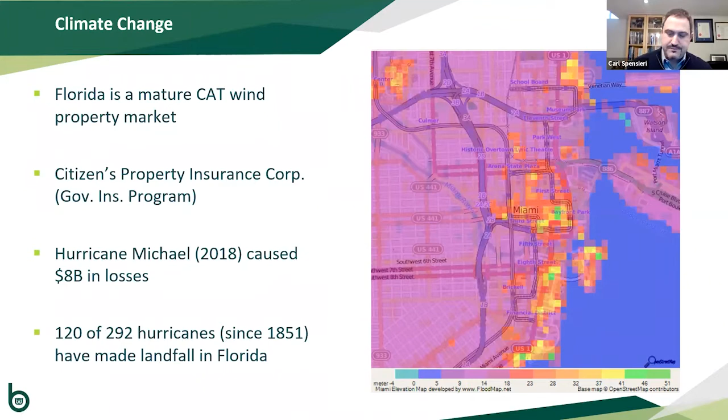From an insurer's perspective, we think pretty much anything south of Eastern Avenue in Toronto is ripe for some sort of flood event. These models aren't well defined, for various reasons, and that causes significant concern for us as an industry: how do I charge the appropriate insurance and create the appropriate policy language?

Policyholders are seeing that today. If you have homeowners insurance in this part of the world, it's basically a patchwork: I'll cover you for overland flood but not sewer backup, or I'll give you sewer backup but not infiltration. There's a variety of sublimits applied to people's policies. So the industry is uncertain how to tackle the problem and how to price it.

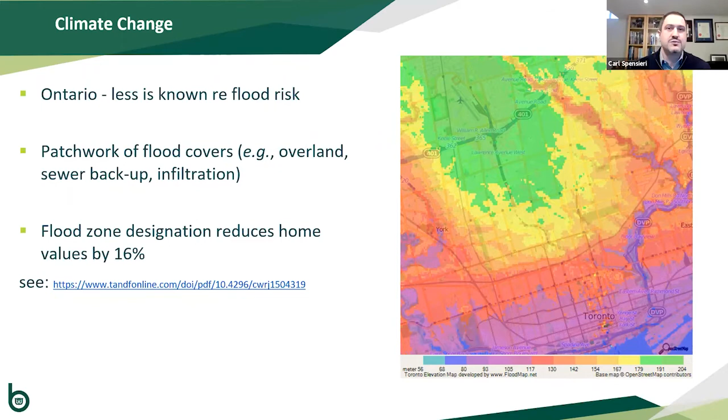One last thing before we move on: imagine a major storm event triggering mass flooding in the Toronto area. Homeowners may or may not be adequately insured. For those who aren't, they face a difficult decision: incur $50,000 to $100,000 of their own money to fix up and respond, or weigh that against other financial realities like mortgage payments. These are the types of things we grapple with as an industry—traditional insurance and the broader implications for the greater community.

Here too we have the same problem: the risk management frameworks and models we used to rely on as insurance companies are no longer holding up. For example, it was very common to see pipelines built right on top of what we thought was secure permafrost, which is now subject to freeze and thaw cycles, creating settling and landslide type events. So the frameworks we thought made sense are starting to show themselves to be incorrect.

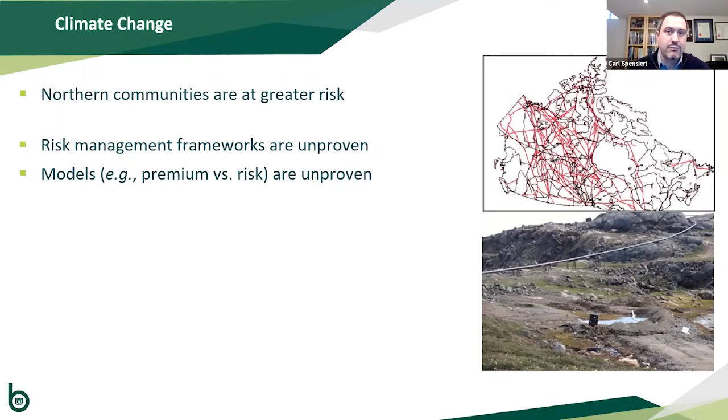And then there's the difficulty of pricing for this. If your models aren't correct, then the premiums you're looking to charge and the coverage you're looking to provide are probably incorrect as well.

Now here's where we get some real concrete examples—back to the Toronto area, my apologies. How do you manage flood? The old way for insurance companies was to look at flood maps and floodplains, using that historical data to inform future risk.

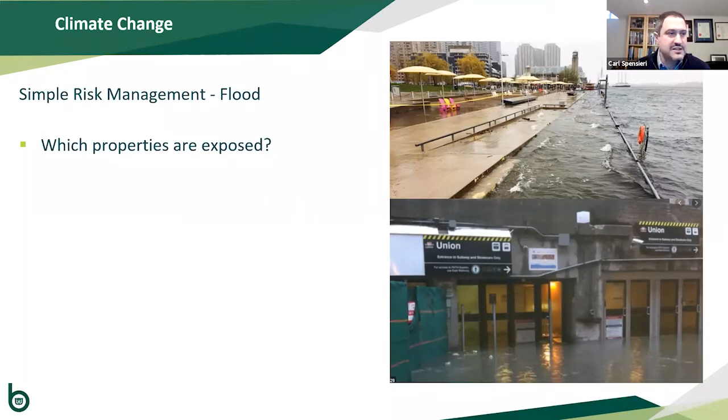That's 4 times in a decade for one of our most significant pieces of transportation infrastructure in the country. So I'll leave that here, and this is where Gord will pick up. He'll start talking about how we can evaluate and identify these risks and what we can do about that with regards to existing buildings.

I'll now switch and try to be a little more optimistic and speak to what it is we can do going forward to help us overcome this. One reason I'm often criticized for being too optimistic about climate change is that I realize today at least we understand what the solution is. Regardless of your views on climate change, whether you selfishly want the environment to improve, whether you have an economic incentive, or you just believe in environmental issues, one of those three threads is pulling you into the debate and asking you to take action to solve the problem. We have a concrete understanding of what the problem is and the steps needed to address it.

Here are some solutions that the insurance industry, in collaboration with others, has put together. The first one, relative to flood, what you're seeing at the top right-hand corner are homes in California, designed to help communities deal with New Orleans, Katrina-type events in the future. These homes are anchored into a foundation, but designed so they can float and move up and down as needed in the event of a flood.

Not only do they rise and fall with water levels, they're also equipped with solar panels and water filtration systems, so these homes can basically act as their own self-contained pods, not needing power from the grid or water from a municipal drinking source. In a major flood event like we had, families in these homes are able to be self-sufficient for up to 30 days. So that's quite an interesting and rather novel design.

These elements add about almost $100,000 to the cost of a home. But as you scale this across broader communities, these costs don't become too much of a disincentive, especially compared to the benefits of a community that can withstand a flood event. It starts to become pretty easy math to make these sorts of improvements work.

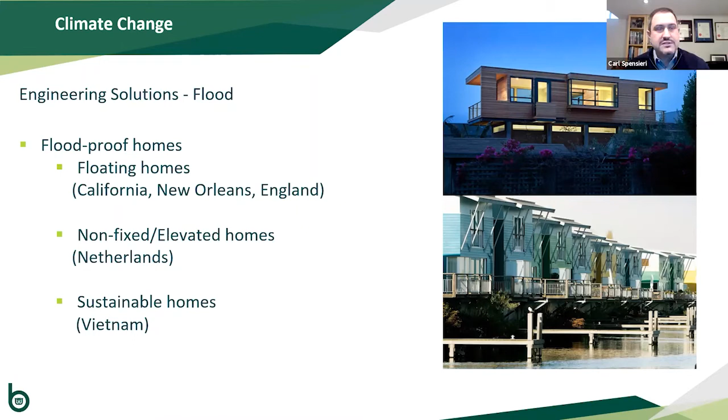So again, just a variety of different ways to tackle and adapt to the problem. We've been talking a lot about wind and water. Fire, interestingly enough, is what created the property insurance industry. We've done such a great job controlling and minimizing that risk that it's no longer one of the main drivers of property losses. But we're starting to see it come back, a function of our climate warming and unfortunately drying out.

Let's go south of the border to the other coast this time. If you live in California, there are roughly 4.4 million homes representing around 11 million people who are at risk each year due to wildfire. And if you live on the west coast of Canada, some of you experienced the smog and smoke associated with this year's fires in California, all the way up in Vancouver.

So again, here we have tools available to us. There are certain design elements we can incorporate into communities. We can even do things as extreme as creating communities with built-in fire corridors so that when these wildfires happen, they go through the community through a predetermined path, sparing critical infrastructure and residential areas and directing the fire elsewhere.

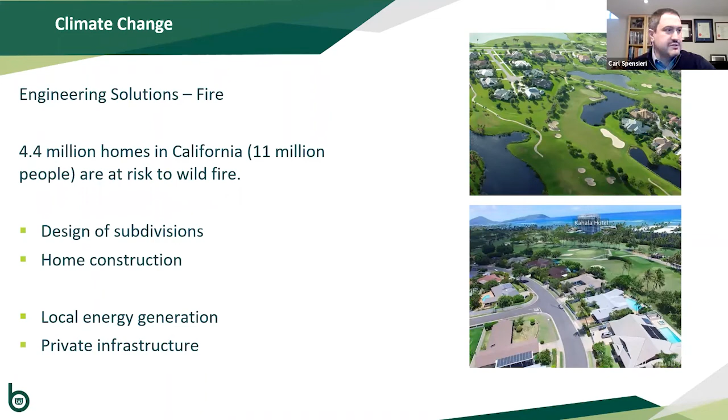So those are some simple examples. And now at this point I just want to hit on the third topic. The first piece, obviously I am part of the insurance industry, and as such they don't necessarily let me out very much. So when I get an opportunity like this, I certainly want to raise a couple of things that I see impacting our industry and our insureds. And I think that these are just items that maybe need additional conversation.

So the first one: during COVID-19, the Government of Canada made some grants available to businesses. And the one requirement for businesses to access those grants was that they agree to make certain climate change and ESG reporting part of their regular disclosure. And ultimately, especially someone like me in the environmental industry, you sit there and go, this is a great idea. And I think shareholders and investors need this information. And I think this is the direction we want to go.

But what concerns me is using an event like the one we've just come through to try to make some companies take this step perhaps a little sooner than they were ready to. And the reason I say that is, if you've ever been part of preparing any financial documents that these companies have to disclose, it's quite the process. And there's a lot of controls that need to be in place, and a lot of research that needs to be done for those disclosures to be accurate and not to cause additional problems.

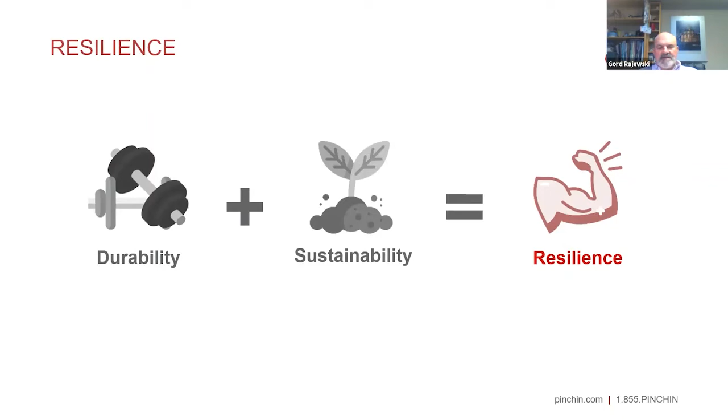What is resilience? Resilience is, by our definition, durability plus sustainability together equals resilience. We think resilience is the future of sustainability at Pinchin. There's a lot of interconnected aspects.

Multiple energy sources are considered, recycled, reclaimed water, disaster fortitude design, emphasis on passive systems, reduced environmental effects, floodplain evaluation, locally sourced materials, access to transportation, and indoor environmental quality. These concepts all intermesh between sustainability and resilience.

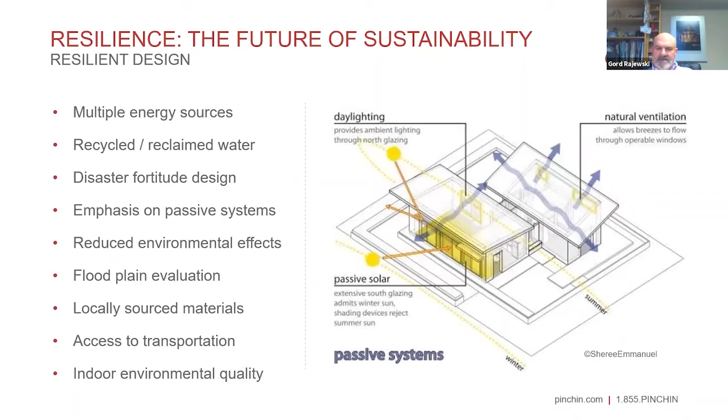Now let's talk a little bit about the work that can be done to anticipate extreme weather events. We call these climate risk vulnerability assessments. These vulnerability assessments are steeped in

codes, if you will, protocols that have been established and are in place and have been working in Canada for many years now. Going back to 2008, the PIEVC engineering protocol was first used to evaluate Canadian infrastructure against climate risk. In addition, there's the ASTM guide for climate resiliency, planning and strategy, the CSA guide for durability, ISO 31000, and all of these protocols are taken into context with BOMA BEST, GRESB, Fitwel, IRM, LEED.

So what does a climate change vulnerability assessment look at? It looks at your site. It looks at your structures. It looks at your base building systems, communications and security, interiors, equipment and furnishings, and it proposes risk mitigation and adaptation measures. It does this in concert with climate modeling.

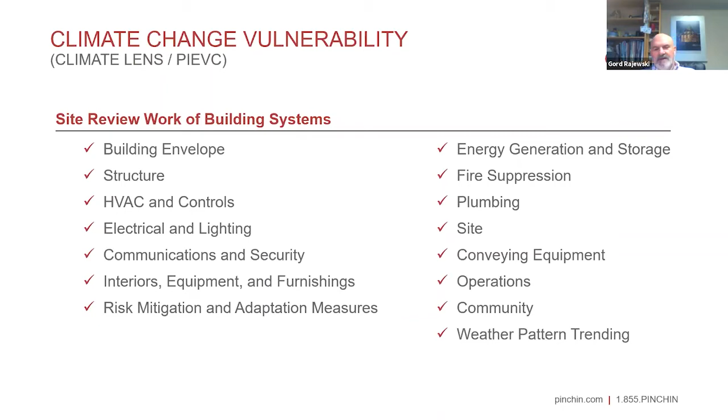So essentially what we do first is we look at where your infrastructure is located, and then we use a model that has been designed by Environment Canada to try to evaluate what the weather might be like in 5, 10, 20, 30 years from now. Knowing a little bit of that climate model data, we can then apply that to what we'll call our climate lens, so that we can then better evaluate your infrastructure against risk.

The outcome or the output of that assessment is a report. So this is a snapshot of a report that was prepared for 6 GO stations in Metro Toronto, where the evaluation included an assessment of the building structures and the systems in those building structures. Out from that, a table is prepared, which is basically the climate lens output.

This particular study concluded that the 2 greatest risks to these GO stations in Toronto were flooding, overland flooding, and loss of electrical transmission or electrical power. So once that was understood better, adaptation measures could be then proposed and recommended and eventually designed.

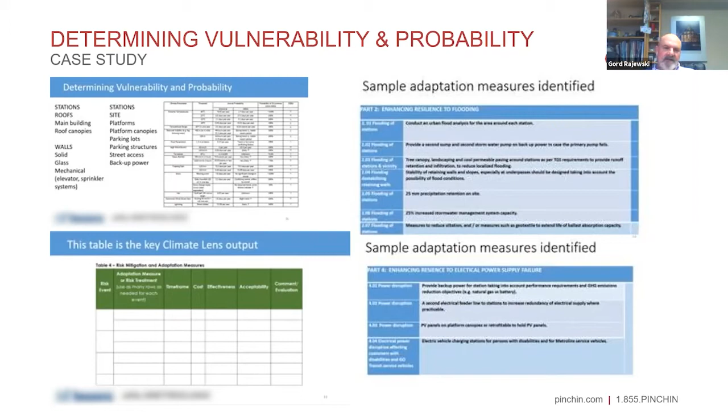So let's talk a little bit about strategic asset management and the economics of adaptation. Who's going to pay and how's that going to work? First, we have to consider, as Carl pointed out, the ESG aspects. For those who might not be familiar with what ESG refers to, it's environmental, social, and corporate governance.

These are the 3 central factors in measuring the sustainability and societal impact of an investment. This is really key because ESG is becoming a leading factor in how developers are going to be funded going forward for their new designs, and may also be funded for retrofit measures, adaptation measures that could be required.

To make their buildings more resilient in the face of extreme weather, one of the benchmarks used by investors globally is called GRESB. This is a global benchmark for the infrastructure sector that assesses ESG performance at the asset level for infrastructure asset operators, fund managers, and investors that invest directly in infrastructure. The tool offers high quality data and advanced analytical tools to benchmark ESG performance, identify areas for improvement, and engage with investors.

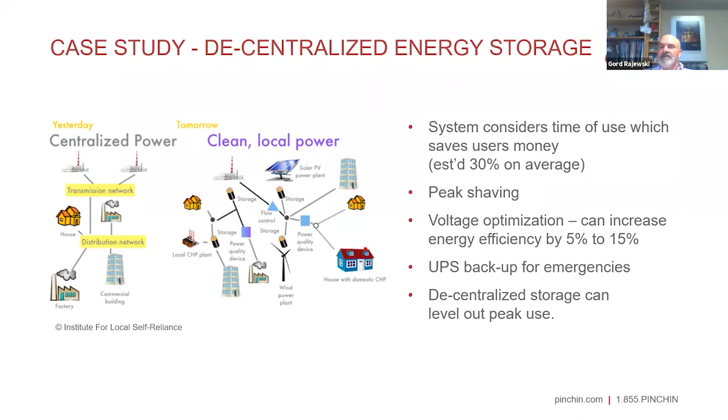A simple snapshot is an RBC branch in Ontario. The upfront investment for system equipment to introduce smart battery technology and photovoltaics was $65,000 for that particular branch. It was estimated that greenhouse gas emissions could be reduced by 2,800 kilograms, involving 47 tons of total GHG by 2035, which is a central goal of RBC. This also results in 54% annual cost savings, and it presents a 5-year ROI.

Now, why wouldn't an owner consider something like this for their building? You've got a short ROI, a relatively small upfront capital investment. You're doing good things for the earth, and you're paying yourself back in real time.

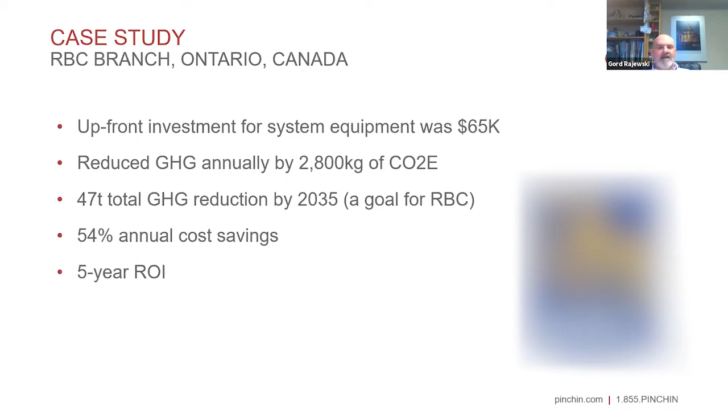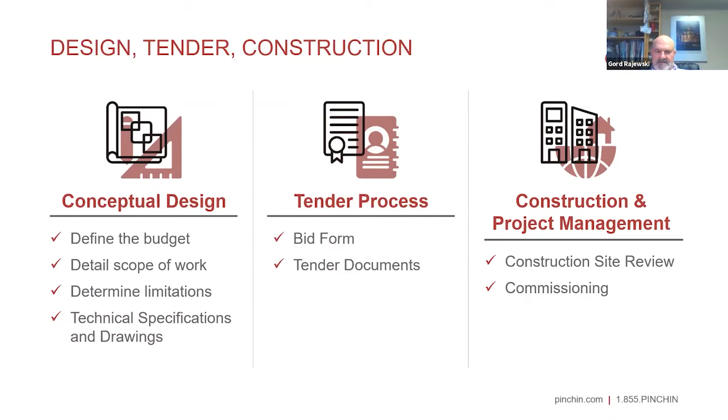Implementing adaptive measures, once it's understood what those measures are and what their cost might be, it essentially becomes a construction project at that point. There has to be a good design, a good plan. There needs to be tendering, construction and project management. Plus, there needs to be good commissioning and follow-up.

Now let's shift gears and talk a little bit about some of the things that my friend Carl has introduced to us today.

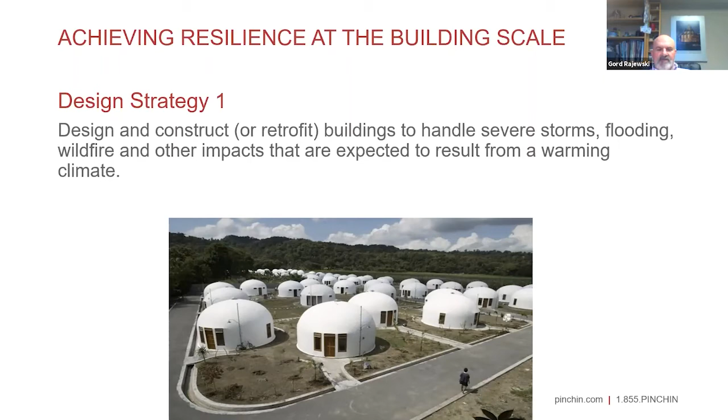The Resilient Design Institute talks about different design strategies. The first is to design and construct or retrofit buildings to handle severe storms, flooding, wildfire, and other impacts. The image on your screen is of a village in the Philippines highly prone to hurricane conditions. You can see by the shape of the buildings and the way they are spaced that this community has been designed to anticipate the high winds associated with hurricanes and other effects.

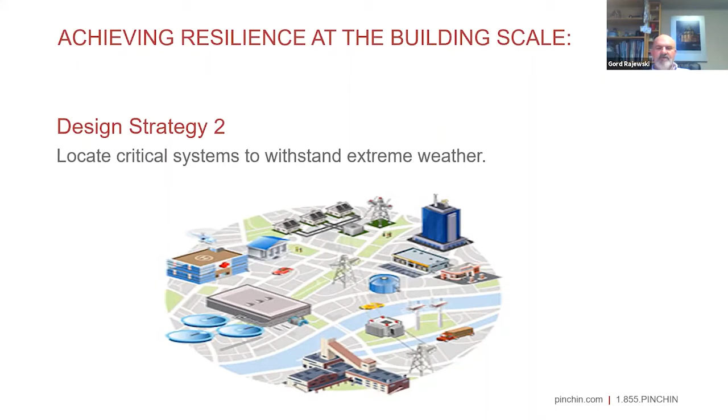Second strategy is to locate critical systems to withstand extreme weather. If it's identified that the key systems we need to survive are vulnerable, we must now plan how to move them or protect them.

Third strategy, model design solutions based on future climatic conditions as much as possible. This is an excerpt from a request for proposal from the Vancouver Coastal Health Region, where they're asking consultants to include in their design process what the weather might be like 30 years from now, so that the design accounts for the fact that current weather will not likely be the same in the future.

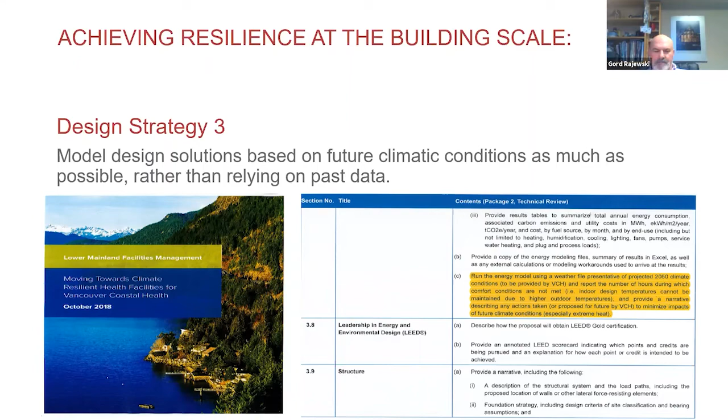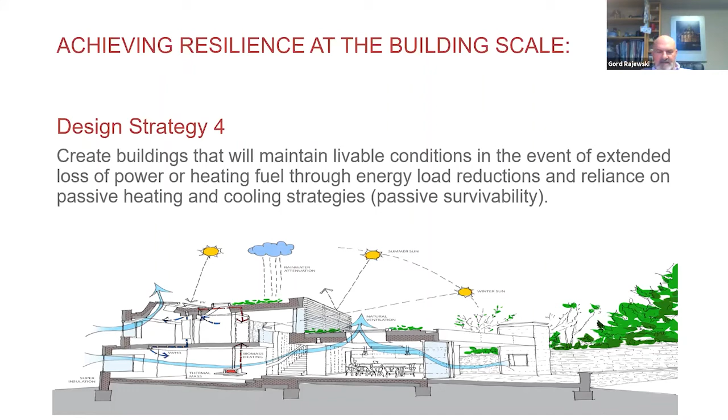Fourth design strategy, create buildings that will maintain livable conditions in the event of extended loss of power or heating fuel, through energy load reductions and reliance on passive heating and cooling. So if the power goes out for an extended period in Winnipeg, Manitoba, or anywhere on the prairies when it's cold in January, how can we create livable conditions that will allow people to survive and be sustained? That's the principle of this design strategy.

Fifth strategy, create durable buildings using features like rain screen details, windows resistant to hurricanes, interior finishes that can dry without needing replacement. Why are we still using gypsum wallboard in 2021? This is a material that when it gets wet, deteriorates and promotes the growth of mold. By now, we should be looking at something better, shouldn't we? Because this is one of the first products that is often removed after a flood condition. So I'll leave that with you now.

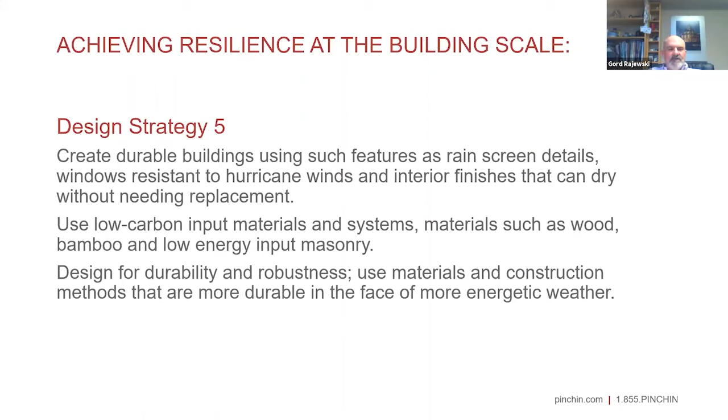We also want to use low carbon input materials and systems, materials such as wood, bamboo, and low energy input masonry. We want to design for durability and robustness.

Sixth strategy, create beautiful buildings that will be loved and maintained. We are not advocating building concrete pillboxes and bunkers that no one will be happy living in. We're not advocating buildings that have no windows, that don't have natural light. We're actually advocates of the opposite, that if we can create designs that people will enjoy being part of, but these designs are also created with resiliency in mind, likely these buildings will be preserved, maintained, and people will enjoy being in them.

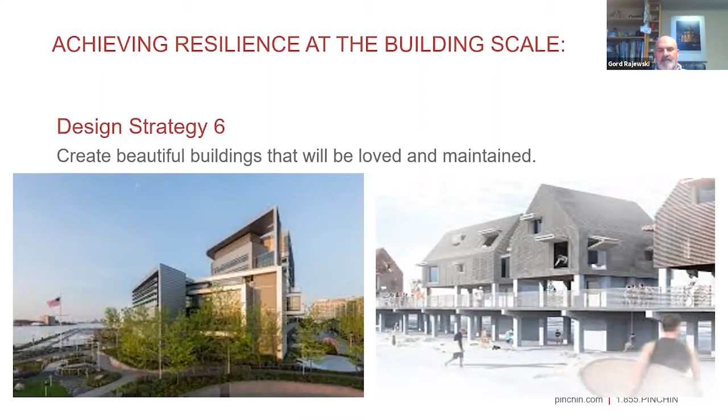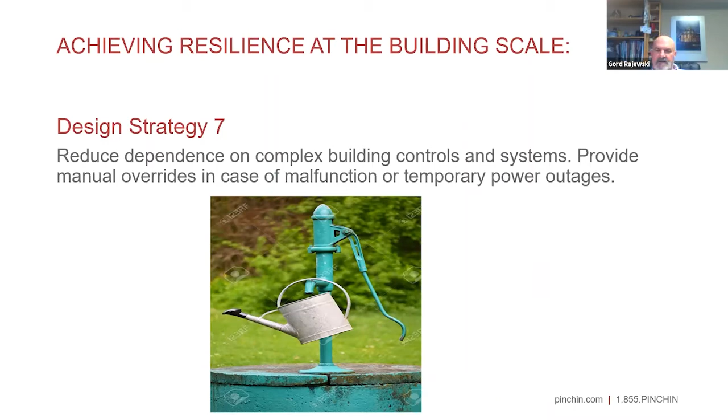Seventh strategy, reduce dependence on complex building controls and systems, provide manual overrides in case of malfunction or temporary power outages. A simple analogy or example is the water pump. Perhaps we'll have wells or other means to draw water from should the electrical power be down for a while.

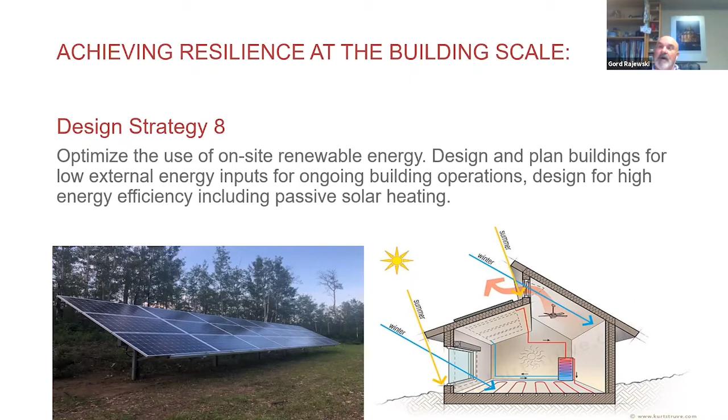Eighth strategy, optimize the use of on-site renewable energy. Design and plan buildings for low external energy inputs for ongoing building operations. Design for high energy efficiency, including passive solar heating. The image to the right shows a home that incorporates passive solar heating, allowing the sun in, allowing the walls and floors to be heated using the sun's power. The image to the left is a solar panel grid that one can purchase and have available on their property to collect power and to pay back to the grid.

Ninth strategy, design buildings for maximum daylighting. Daylight will be the primary source of lighting for buildings in the post-carbon city. So the shape of your building, the way the windows are positioned to allow light in, reduces the need for electric lighting.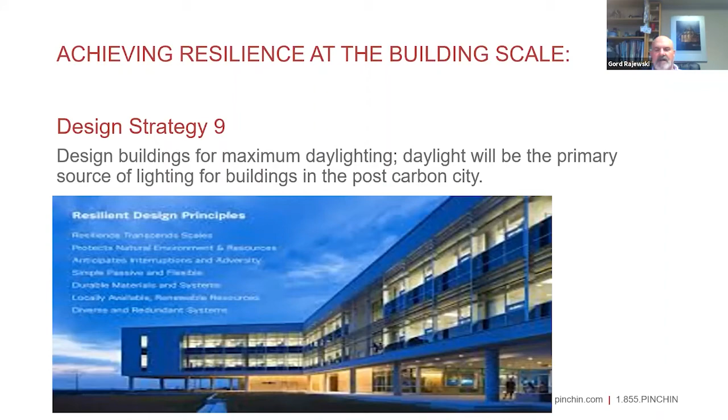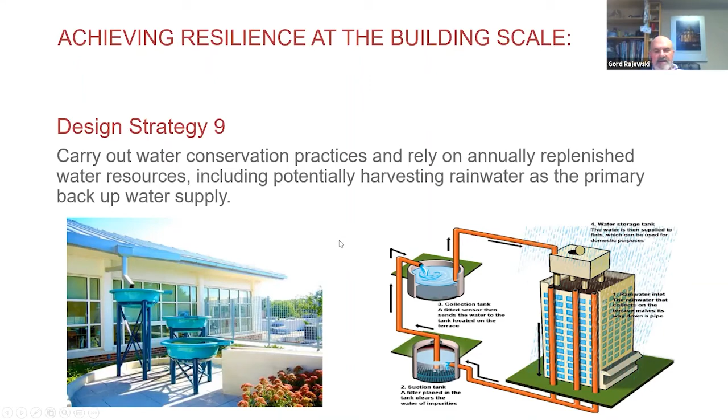Carry out water conservation practices and rely on annually replenished water resources, including potentially harvesting rainwater as the primary backup water supply. This is not a new idea. We've been doing this for some time. Some communities are doing this already, and doing it better.

Here's an idea I'm quite fond of: recognizing that extreme weather, annual rainfall, and extreme rainfall will be increasing in certain locations in North America, what if we were to re-examine the ability of a building to store and capture that rainwater for a period of time while we allow the municipal system to catch up? If we could store more water on top of the building safely without causing damage to the interior, we could use that water as needed elsewhere in our daily living, or release it back slowly into the municipal infrastructure system. This would involve significant redesign of structure and waterproofing, but this is called a blue roof, as opposed to a green roof.

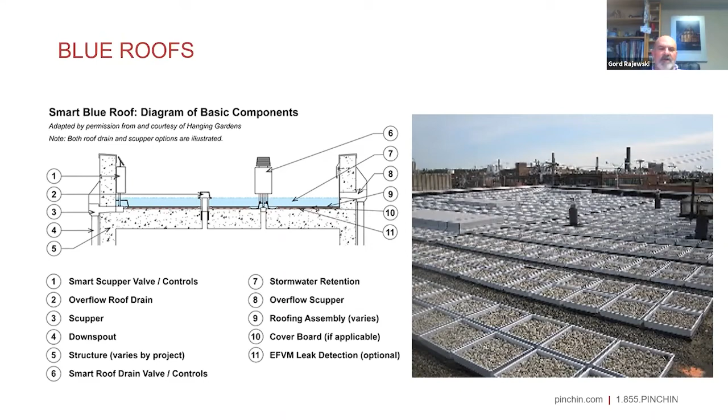Another way to provide redundant water supply is the concept of using gravity-fed systems, which have been around for hundreds of years. In small communities throughout North America, and Canada in particular, the image of the water tower is still with many people, as some of these towers remain in use. On Manhattan, you'll see lots of these wooden structures on top of buildings. These are in effect gravity-fed water reservoirs that supply water whether or not there's power available to drive the system.

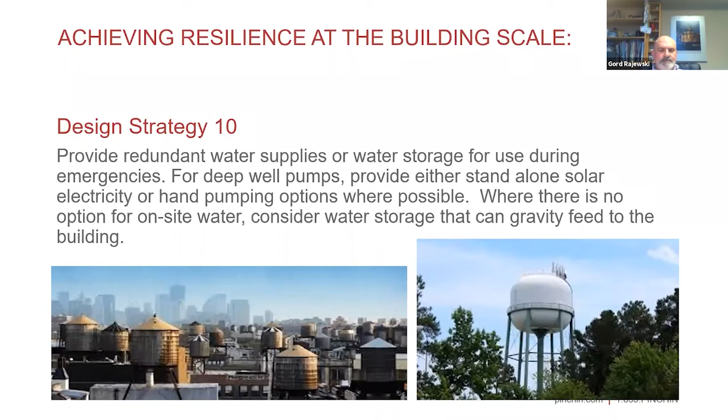Considering options for human waste disposal in the event of non-operating municipal wastewater, using composting toilets and waterless urinals.

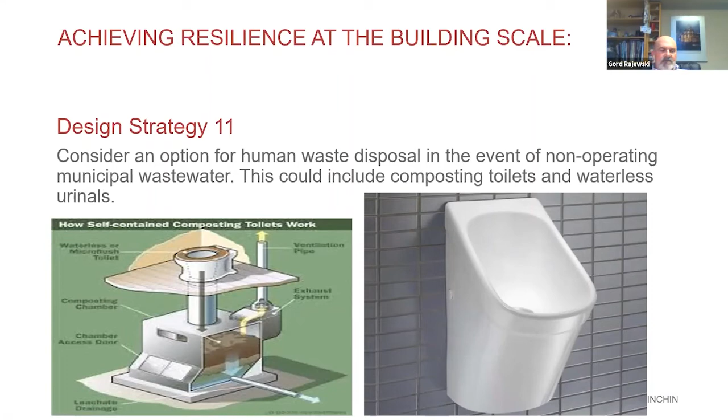The 12th strategy: design for use of local materials, available products, and skill sets. Resilient cities will need to be much more localized in their use of materials and products. We use the example of the Richmond Olympic Oval, a beautiful timber-framed structure with laminated beams that arch through the interior. All of these products are locally available in British Columbia.

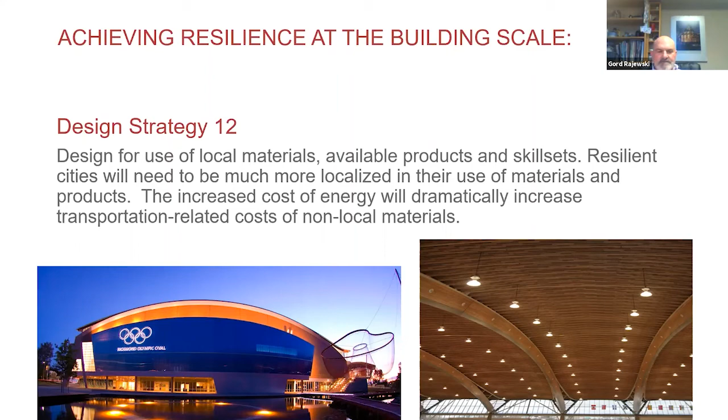13th strategy: we must specify products and materials that will not off-gas or leach hazardous substances in the event of flooding or fire. I already spoke about why we're using gypsum board, drywall, to this day. We use it because it's cheap and readily available, but it's one of the worst materials to have inside our home if there's a flood. If we were to look at alternate products that will not mold, or cause people to become ill post-flood, that's what we should be doing. We should be considering opportunities in building code and looking at materials that will be healthier for us in the event of extreme weather loss.

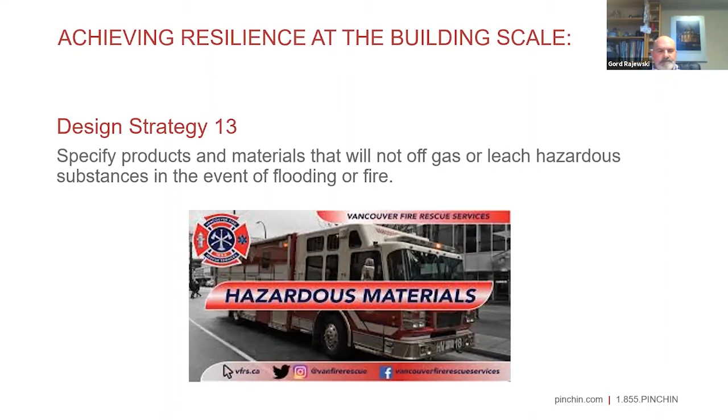We should be relying on vernacular design practices. Basically what we're saying here is we want to go back to the future, if that makes sense. There are many lessons that can be learned from the past that we should be bringing forward as we contemplate extreme weather and its effects as climate changes.

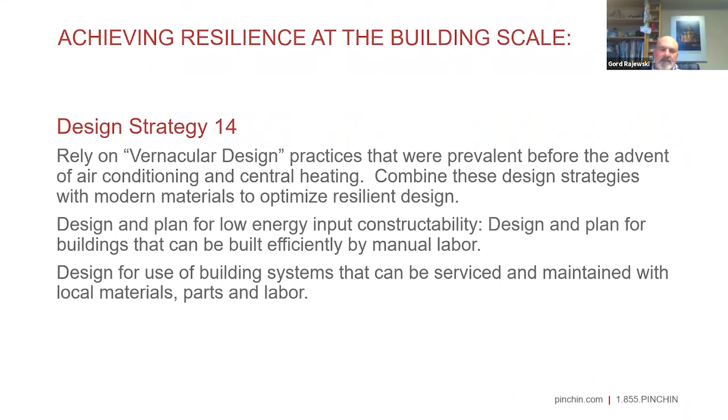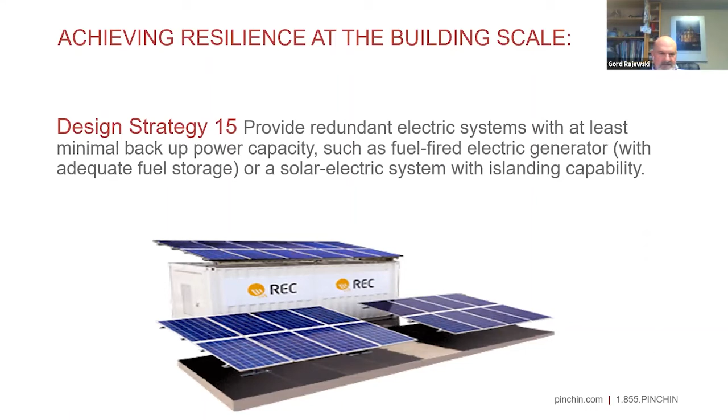15th strategy: provide redundant electric systems with at least minimal backup power, such as fuel-fired electric generators with adequate fuel storage, or a solar electric system with islanding capability.

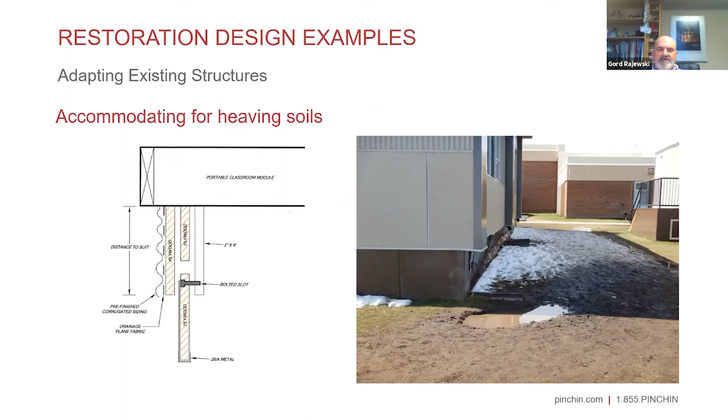The image shows a simple sketch of how you can introduce an adaptive measure that recognizes the annual heaving is likely to continue. If we know this is happening, we can adapt and create simple designs that allow the soil to move up and down in the spring without causing damage that has to be repaired and replaced annually.

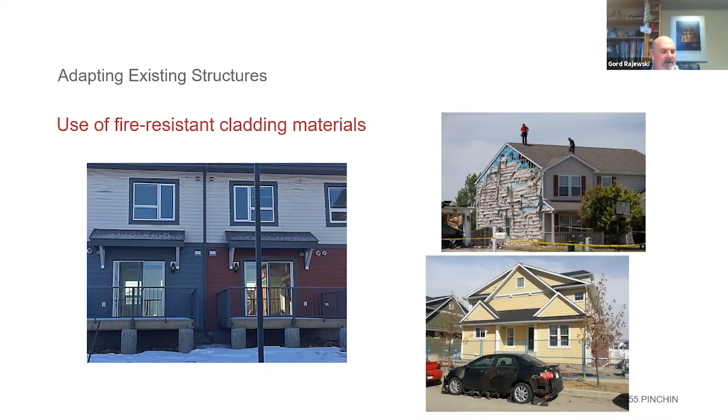Use of fire-resistant cladding materials. Here are various images showing the effects of heat and fire on residential buildings. The image at bottom right shows a car parked in front of a house in a neighborhood subject to wildfire. The car suffered melting and other damage, whereas the house's cladding did not, because it was of a kind resistant to fire.

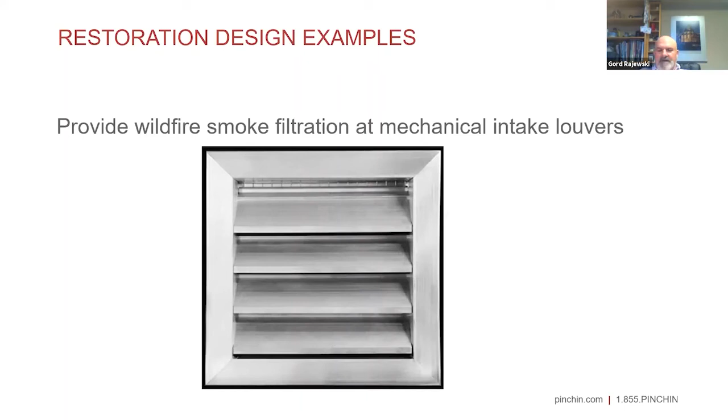In Fort McMurray, during the wildfire, more than 25% of the building infrastructure burned. But what we also don't always hear is that 80% of the building infrastructure suffered damage from smoke infiltration, soot, and other particulate damage. If we understand that wildfire is a threat and a risk, why aren't we putting more thought into creating filtration systems at the outside of the building envelope, in recognition that if the building doesn't burn, it's probably still going to be subject to harmful smoke infiltration?

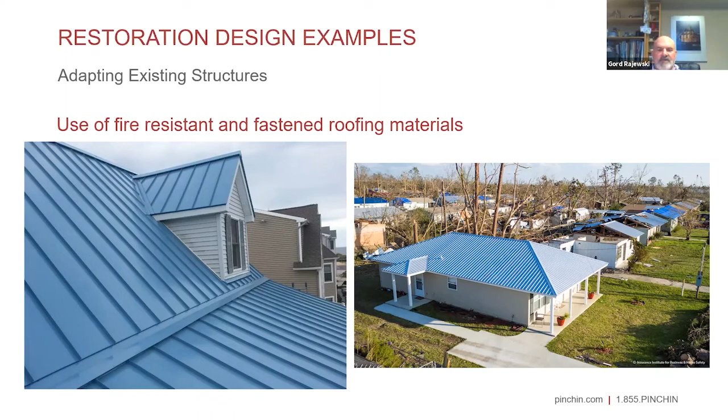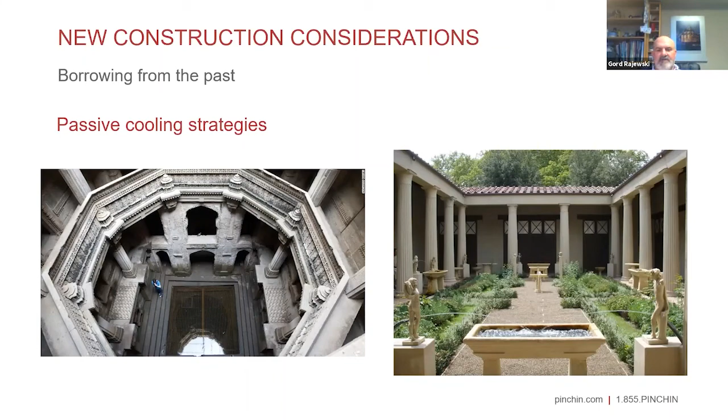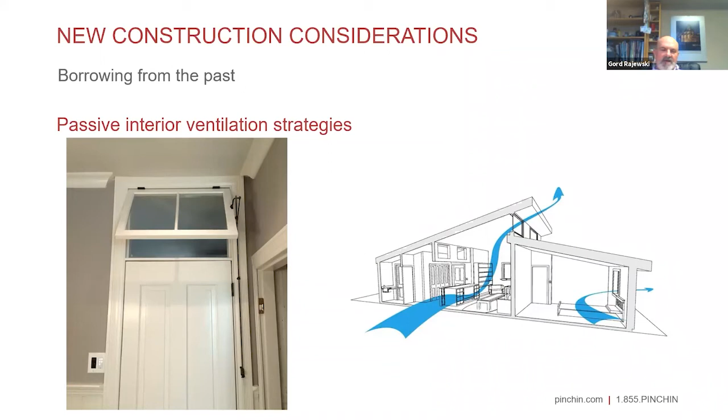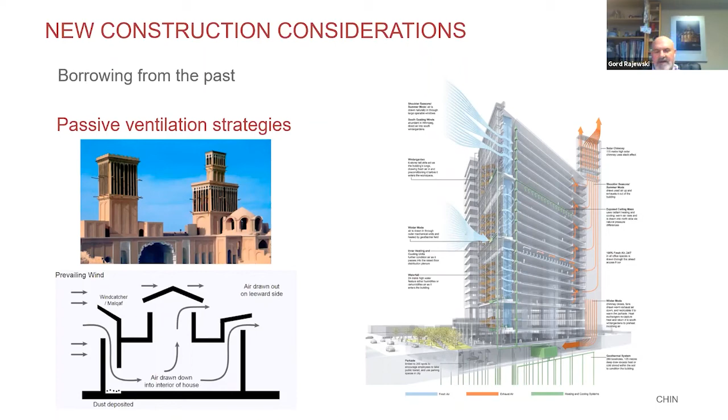Modern examples of passive interior ventilation strategies include transom windows and the basic design and shape of buildings to allow air to flow through during those times when you can't have your windows open in Canada. Modern buildings like the Manitoba Hydro building on Portage Avenue in Winnipeg incorporate many of these principles. You can apply the same kinds of thinking to high-rise design as you can to residential design. Basically, we're trying to use passive techniques to reduce our reliance on mechanical fed ventilation.

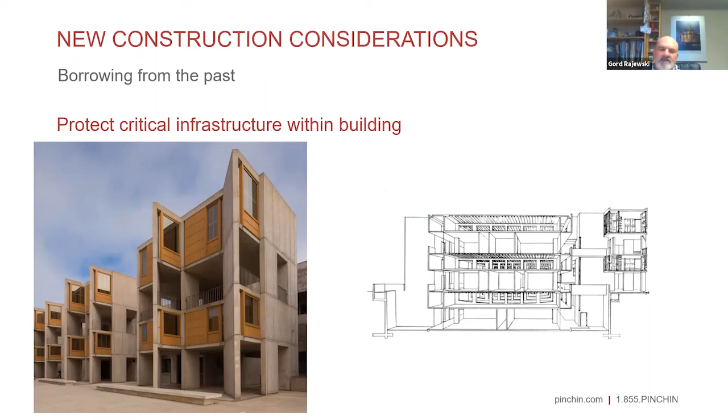Protect critical infrastructure within the building. This is an institute in California where you can see by the shape of the building that it's been designed to let water flow through it. All of the critical systems are inboard of the outside, protected inside concrete ductworks. So this building is quite protected against flooding, wind, fire, and other such weather.

Maximizing daylight through floor plan shape, let the light in. This is an old example, an old building in Edmonton, Alberta, a federal government building that incorporated many of these philosophies in its design.

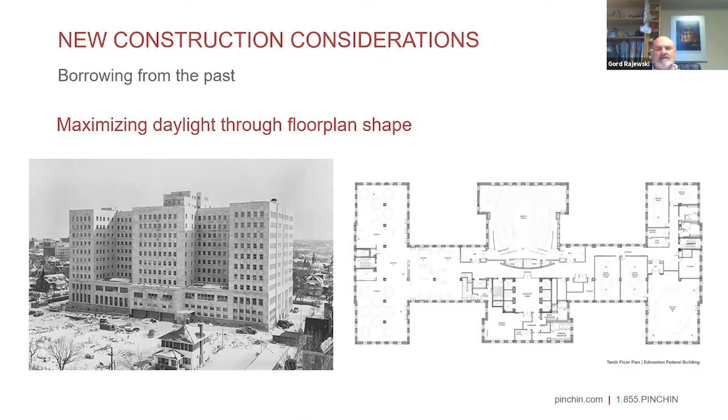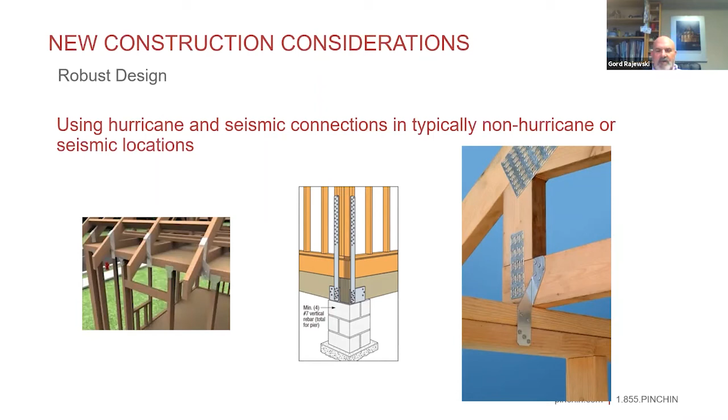Using hurricane and seismic connections. A lot of these devices are not expensive, and our building codes need to be updated to reflect their use in residential and wood frame construction in particular. So for pennies on the dollar, we can already be improving the robustness, the resilience of our wood frame structures by incorporating some of these ideas.

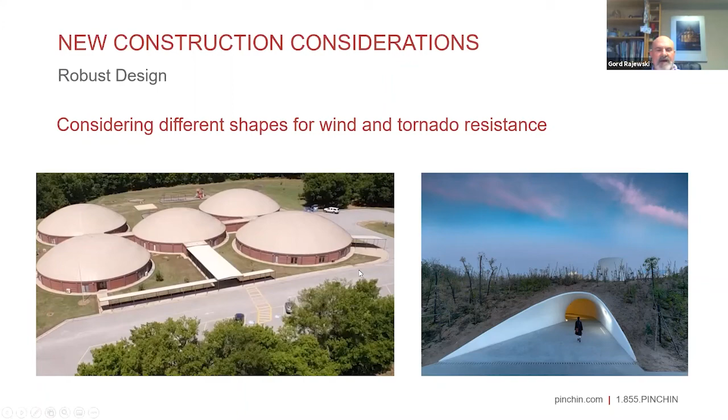Considering different shapes for wind and tornado resistance. The image to the left is a school in Oklahoma in Tornado Alley. It's the focal point for the community during emergencies, and its design reflects that need and also the fact of where the school is located.

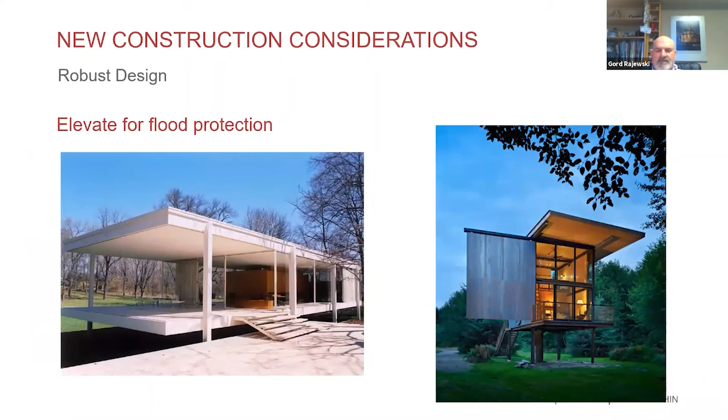I am an advocate of creating homes in floodplain areas that would not have permanent foundations, but would either be tethered or, as Carl pointed out in his slides, have the opportunity for the building to remain in place and move up and down as water levels rise and fall.

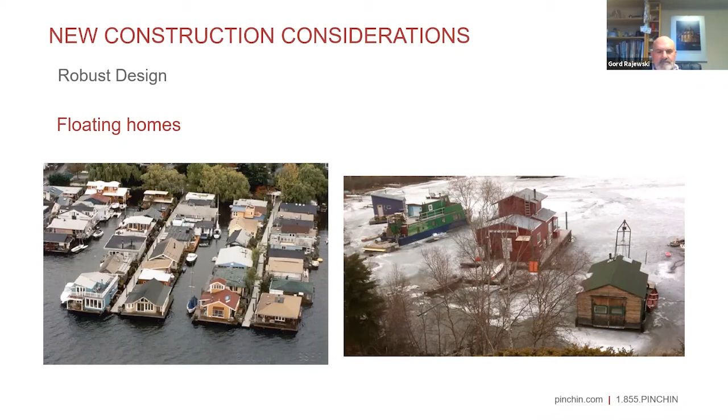Thank you, Gord, and thank you, Carl. Two excellent presentations, some very thought-provoking sections there. One question, well, a few questions, but one question I'll ask, it's for you, Carl. It's really regarding the replacement concept of insurance. It's in Calgary, we had a substantial insurance claim as a result of a hailstorm.

One of the challenges was that the insurance didn't cover upgrading to hail-resistant shingles when replacing - they just replaced the old model, if you like. Is there any move in the industry to make replacements more resistant to future claims, or is that not there yet? Well, great question. So, Gord talked about creating roof structures that are more resistant to wind, and that's something the insurance industry actually did fund in Canada about a decade ago.